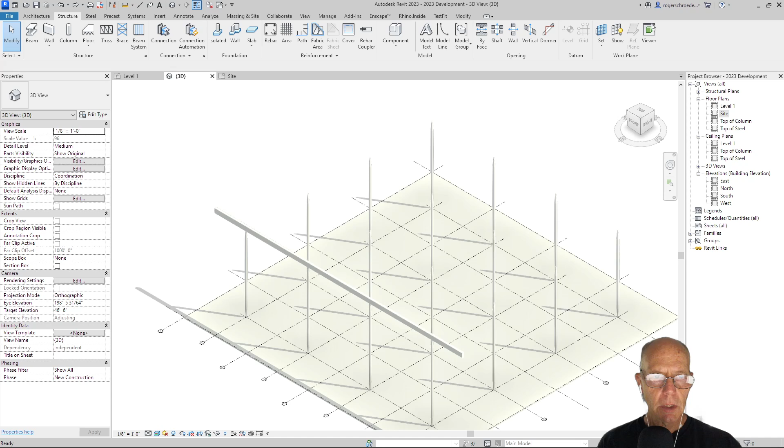Okay, so let's start placing the rest of our beams, and I keep saying columns, so forgive me. All right, once again, we'll go to beam. Our custom beam is preset, so all we've got to do is start drawing it, and that's on the subgrids over the columns. And I had this set for placement level top of steel. Hopefully you did the same thing, or you're going to have to catch it again or start again.

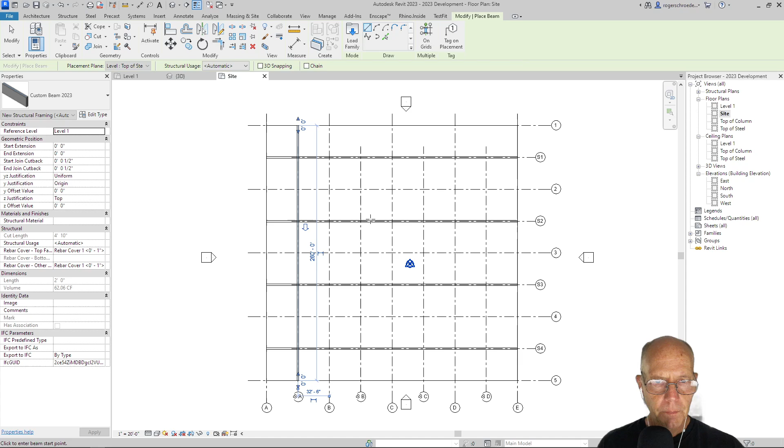Okay, let's see what that looks like. So there we have our major beams. So we're going to make some secondary ones, to catch some loads in between here, because we're going to put, depending on which way you want to attack it, a solar collector or a louver system in this exposed structural steel frame.

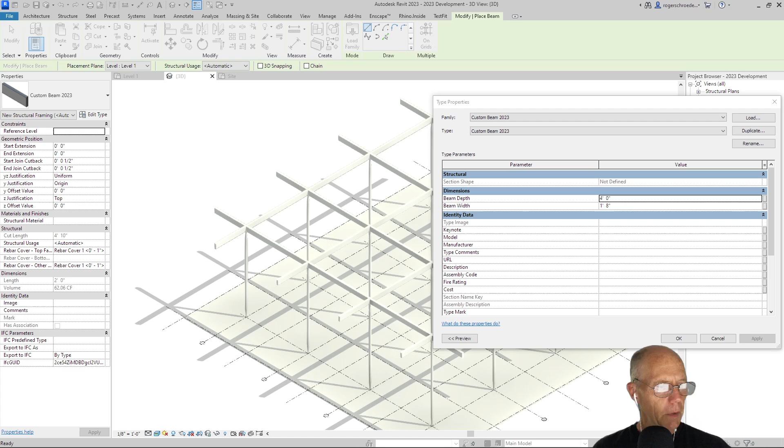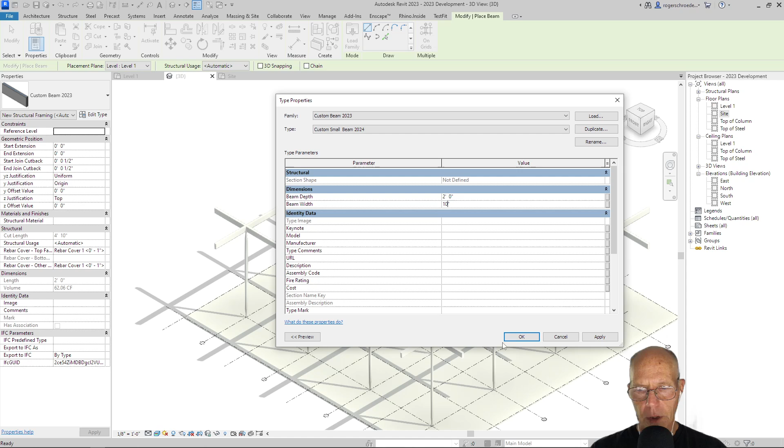So let's go ahead and do that by going to Edit Type, and we're going to duplicate that beam that we're using. So let me make sure that's showing up on your screen. Duplicate, and we'll call this custom small beam. And the beam depth is 4 foot for the major one right now. So let's just make this significantly smaller. So we'll make this 2, and instead of 20, we'll make it 10 inches. Click Apply and OK.

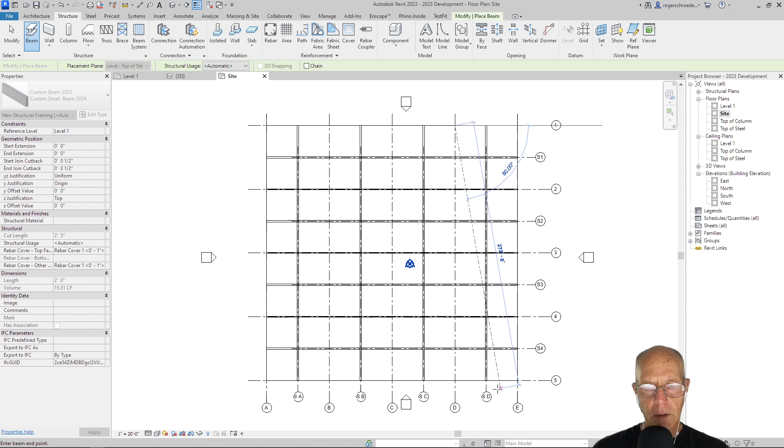And then we're going to draw that minor grid system. So I'm going to grab the structure, the beam tool, and go ahead and start drawing these minor ones. And see what that looks like. All right, so now we have a way of catching almost every one of the modules with a support structure, except for these outside ones. They need some kind of extra structure to hold them up, because they'll be unsupported on this outside span. So we need to deal with that somehow.

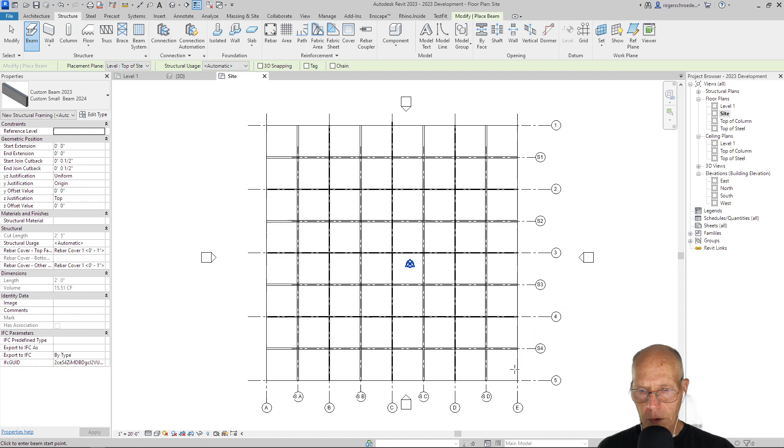One of the ways, and this really isn't that critical, but one of the ways we can deal with that is, what was that? These were 65, so let's just put another one in here at, those would be 32. So let's just do it at 16 feet off the grid. I'll put another one here. Trying to get that 16 feet.

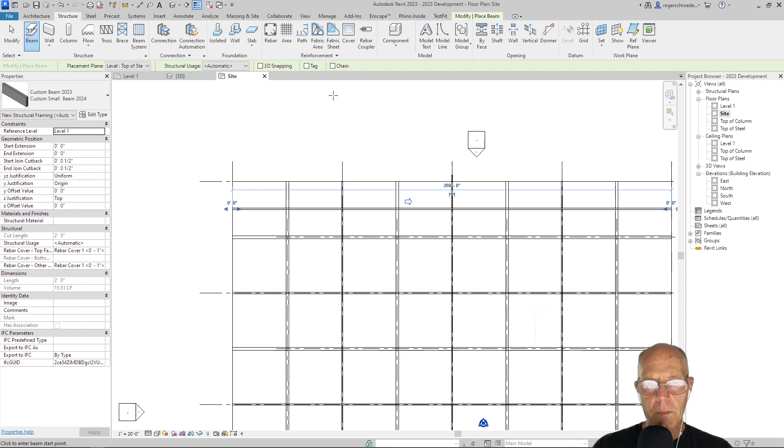And we go back to 3D. And now we have this extra piece of steel that can help support this panel that's going to be laying outside here. And part of that will be cantilevered over. So that completes making the basic superstructure. And now we're going to look next at a technique for populating our roof surface.